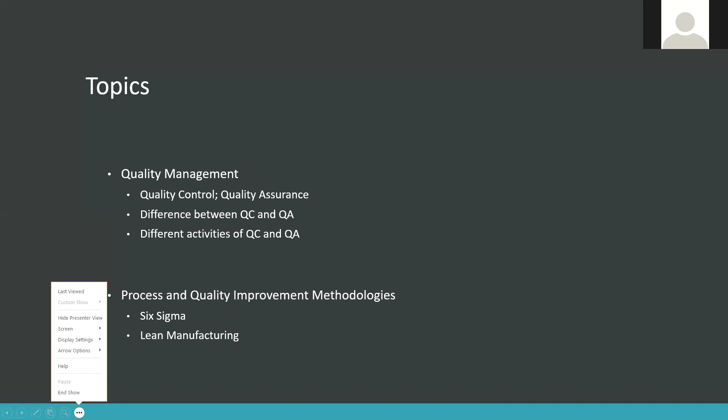So I will share a little bit of what I know, and it might be a little bit different in terms of definitions from your book, but hopefully it will share some of the things that you may encounter when you go into different fields. You may go into engineering or healthcare or business, no matter the industry, you will encounter quality control and quality assurance.

Even though quality control and quality assurance are interrelated, they are actually different by definition and different by function, and we will look into that. Since this is a short presentation, bear with me. I will go only over some of these, just to give you a flavor. But I'm sure Dr. Ray will provide you with the whole gamut from the book. So this is a little bit of my exposure, and I'm just going to share it tonight.

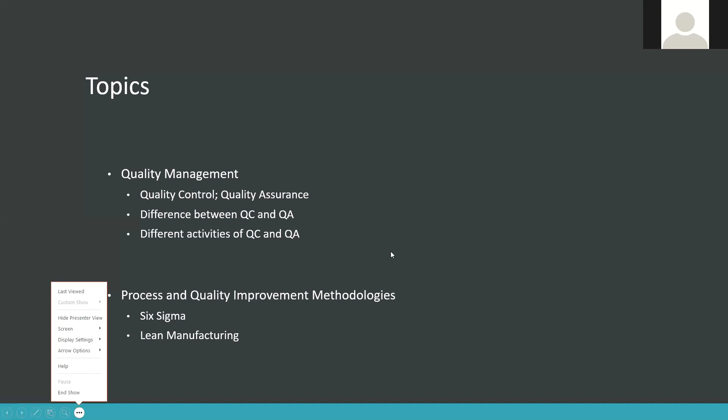First, we need to understand what quality is, and it's quite difficult to nail down, and there are so many different definitions of it. So I offer some of these that I came across. Quality is the degree to which a commodity meets the requirements of customers. Quality refers to how good something is compared to other similar things.

And when used to describe people, we think of it as a distinctive characteristic or attribute. From a customer service point of view, it entails providing efficient, quick, and friendly service. But the most useful definition came from the business side, which is fit for purpose and conformance to requirements. Fit for purpose is the fit, form, and function of the end product.

So you may have a different definition, but I'm sure it's close enough to this. I want to talk about quality control and quality assurance. Like I said, they are interrelated, but they are different by definition. So what is quality control?

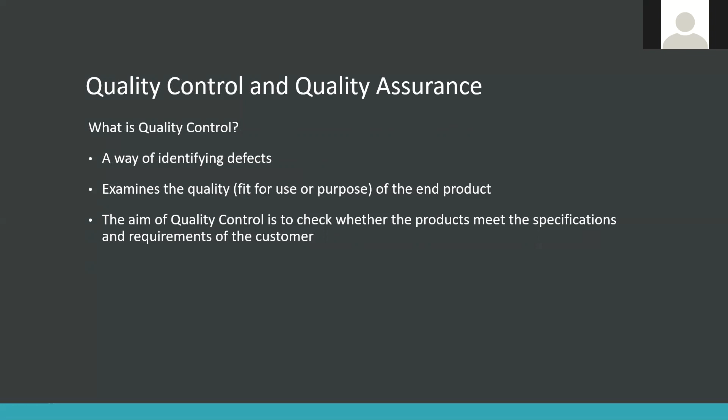So quality assurance is a way of preventing mistakes and defects. It's called defect prevention. So the difference, you can see, is one is defect prevention, and the other one is seeing the defects. So another definition that I know about quality assurance is the way of avoiding problems when delivering products to customers. A declaration. You've probably gone over the ISO certifications. It's a guarantee or confidence that quality requirements will be fulfilled.

In my engineering days, we called this declaration the mil specs. So we work on military specifications. Our components, our processes, our design are based on what is declared in the mil specs. So basically quality assurance is looking at those mil specs, trying to understand them carefully, and designing processes that can be used in the manufacturing or design of the product that will meet the specifications. So it works on both internal and external, guaranteeing or being confident, like I said, that quality will be fulfilled.

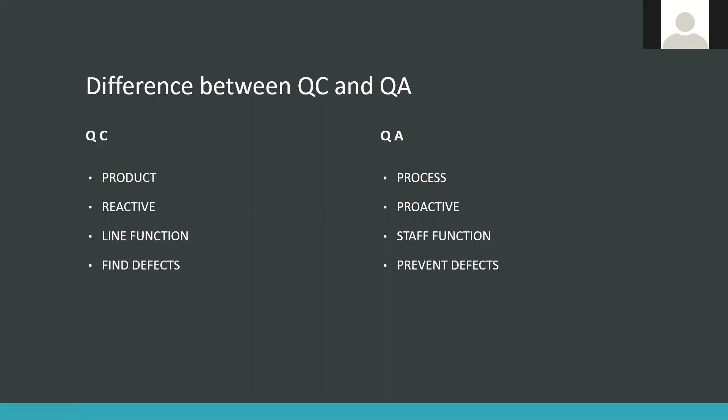The next quality control activity is testing. You may hear in the field of destructive testing, which Consumer Reports actually does a lot. Visual testing is just looking at nonconformities, and maybe electronic or laser-based testing using equipment. Inspection, that's manual or visual inspection, done by quality control inspectors. And also one thing I remember doing is a checkpoint review. This is more like a milestone.

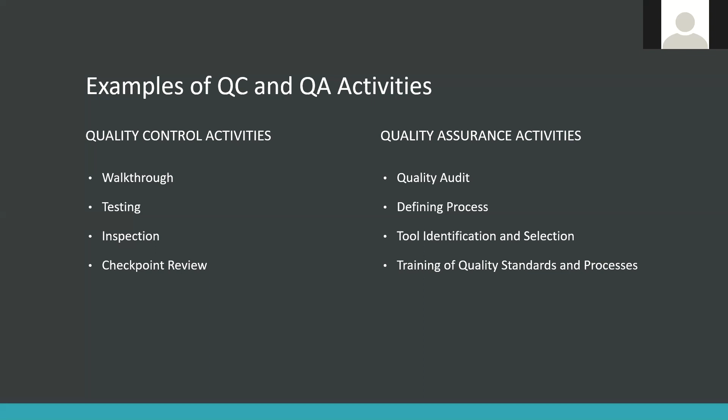So moving on, I'm going to touch on quality assurance and process improvement. Now, in previous slides I mentioned that quality assurance is kind of proactive versus reactive in quality control. But most experts believe that quality assurance cannot be proactive without process improvement. It just can't. So quality assurance and process improvement are really the two key areas in organizational development or performance of an organization. So let's go over some of the definitions.

Now, having said that, this is where the advancement of process improvement comes in. From the time that I started in engineering, there was not a whole lot of involvement by employees. Typically, engineers would tell people how to do their job. And with the advancement of the methodology of quality improvement and process improvement, which I will talk about a little later, employees are more involved. The employee has more say by providing input and assisting staff in the development of processes. Big change.

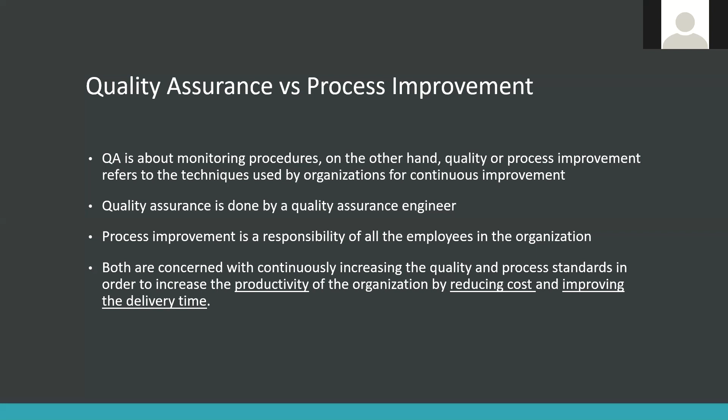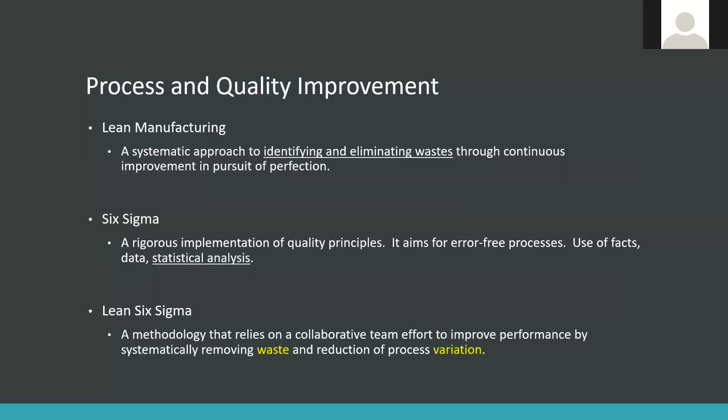So having said that, let's look at process and quality improvement. Well, there are three methodologies that I'm going to share with you, talk about here a little bit. It's called Lean Manufacturing, Six Sigma, and Lean Six Sigma. Let me go to the next slide.

So when we say that quality assurance identifies tools and processes and equipment and so forth, there is a set of techniques and tools for process improvement. And one is the Six Sigma methodology. The Six Sigma methodology is really a heavy use of statistics. It is a rigorous implementation of quality principles. It aims for error-free processes. That means any process should produce nothing but zero defects. We'll talk more about that.

It uses facts and data, statistical analysis, and I'll show you some examples of what those tools are. It was introduced by an American engineer, Bill Smith, while he was working at Motorola in 1986, and I believe it was further developed by a couple of other companies, Honeywell and maybe GE, if I remember right.

So some of the tools in Six Sigma: SPC, you've probably heard about this by now. We use statistical process control to analyze the effect of variations in the process. We use failure mode and effect analysis. It's more for engineering, where we evaluate potential failures in a product. We use the histogram, that's collecting and grouping of data, Pareto analysis, design of experiments, fishbone diagram,

control charts, standard deviation, regression analysis, and of course the most famous is DMAIC, which is define, measure, analyze, improve, and control. Again, I'm showing the tools of Six Sigma, but I believe Ray will cover a lot of these things in your class in more detail, each one of these. I think he might have examples for each one. Maybe you guys are familiar with this.

Yeah, and in fact, Dean, one of the things we did in our last class is we talked about forecasting. And so I gave a little bit of an introduction to some of these statistical processes, like Pareto analysis and doing a regression. We haven't gotten to fishbone analysis, but certainly standard deviation and histograms. So we experimented a little bit with those ideas, and we have some exercises that our class is doing.

Right, and there's a lot more involved in these tools of Six Sigma. For example, there are several control charts that are used to analyze the process or results of the deviations. Okay, so I just want to give you some of those tools.

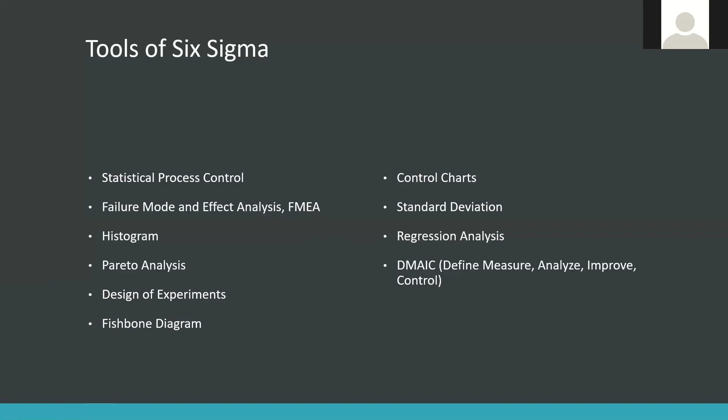Now, another set of techniques and tools that we use for process improvement is called lean manufacturing. It is actually a philosophy. The principles are not just tools. So it's not just an application of tools, but it's actually a philosophy.

If you go and Google lean manufacturing, you're going to find a ton of definitions of lean manufacturing. But this is the definition that I use from my certification from NIST. By the way, I'm certified in lean manufacturing and Six Sigma by the National Institute of Standards and Technology.

So it is a systematic approach to identifying and eliminating waste through continuous improvement in pursuit of perfection. Now I'm adding waste in our presentation here, and I will go over a little bit more about that later on. So lean principles are all about the reduction of waste, or doing more with less,

which is based on the Toyota production system, which, by the way, came from the work of James Womack, who is the author of The Machine That Changed the World. You remember that book? And Lean Thinking. Those are two popular books that he wrote upon observations of the Toyota production system. And lean principles, or lean manufacturing, or lean production came about out of that Toyota production system.

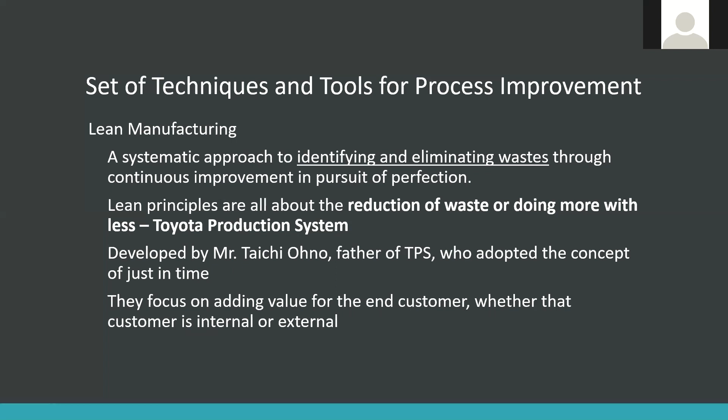So if it's a set of tools and techniques, and we have the definitions, a systematic approach, we have to understand what value is first, and what is non-value. We mentioned that value is a capability. We talk about process improvement and bringing better quality for the customer. Value, we need to understand in a different way, because now we're talking about capability. Value is a capability that you provide the highest quality, at the right time, and at an appropriate price. And it gets a little bit more complicated and difficult to achieve.

Now, value added, on the other hand, are activities that the customer must be willing to pay for. What does that mean? On a day-to-day basis, the customer doesn't want to pay for something that they don't need, or if the production of the product is so wasteful, the customer doesn't want to pay for that, right? If they spend twice to build the product, the customer doesn't want to pay for that either.

Right? So value added are activities only if the activity must change the product. That means, from the perspective of manufacturing or producing a service, the activity that you do must be directly related to or touching the product. Yeah.

And I'm mentioning it because, like I said, lean manufacturing or Lean Six Sigma focuses on elimination of waste. But Toyota has done a very good job at classifying this and making it so simple for us to use. So there are 8 forms of waste. In terms of manufacturing, distribution, or healthcare, they are classified or categorized as defect, overproduction, waiting, not utilizing people's skills, transportation, inventory, motion, and extra processing.

So if we have to identify and measure our performance in manufacturing, the 8 forms of waste go a long way. It's very useful for organizations for making improvements. And quickly, defect is basically producing errors. Overproduction, in terms of lean, is producing more than what is needed by the customer. So when you overproduce, like the picture there, you have a ton of products sitting on and along the desk, waiting for processing, and that is considered a waste.

Waiting predominantly, in any organization, can sometimes be number one. It exists in almost all operations. So waiting for approval, waiting for signatures, waiting for parts, waiting for customers, you name it. Not utilizing people's skills: if we assign people not based on their talents and skills, not utilizing their skills or involving them in process improvement, for example.

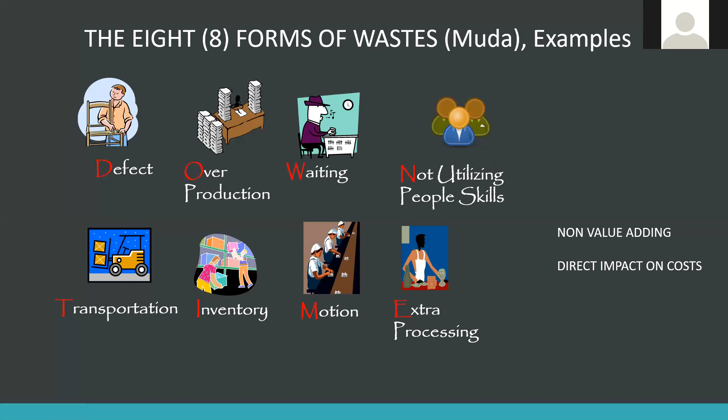Okay. So that's in a nutshell. Okay, and then there's a lot more to talk about this, but just to give you a flavor, there are tools of Lean Six Sigma as well.

Hello? Yeah, we're here. We can hear you. Oh, okay.

Tools of Lean Six Sigma, and now I'm focusing on Lean. And there are so many tools in Lean. Number one, if you heard about it, maybe by now, it's called value stream mapping. It is typically a graphical representation or like taking a bird's eye view of an operation, whereas it studies the

flow of materials from the time they are ordered from the supplier and delivered to your doorstep, the manufacturing floor, processed through in the production system, placed and completed, inspected, goes through the stock room, or directly shipped to the customers.

The difference between a flow charting technique and the value stream is that with the value stream, you are also collecting information. It's actually investigating or evaluating the flow of information. Who's doing and who's telling what in production. Now, sometimes you will find in manufacturing where problems exist. They're telling them so many different ways to do things, and it complicates with one another, and the result is delay.

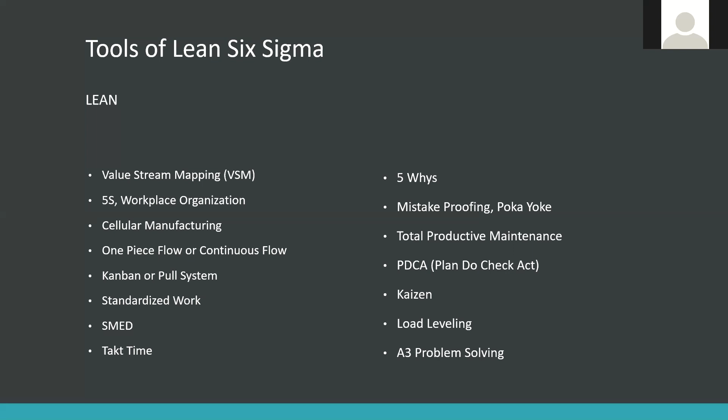Okay, Six Sigma level. Now, if we have the tools, how do we know whether a company that's doing process improvement or quality improvement, spending resources in quality improvement, is performing well or not? This is where in Six Sigma we call it process performance using a Sigma level. Sigma level is, say, 1 to 6. That's why you hear Six Sigma.

Six Sigma is producing a yield of 99.99% efficiency of products. Hardly any defects. It is actually defined as the equivalent of 3.4 defects per million opportunities. That is really, really difficult to achieve. But in any case, a company's performance is measured by a Sigma level of business process. That's in Six Sigma, right?

So if you're Sigma level 1, your yield is 30%. That is not really good, right? So most companies are averaging in the 3 and 4. And now modern companies like Motorola, they're playing around 5 and 6.

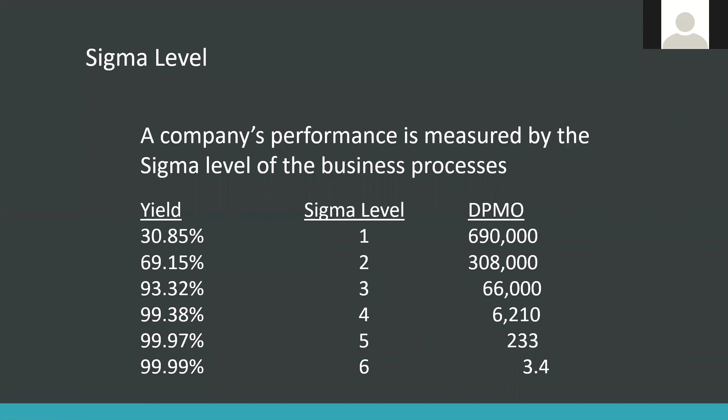Well, and especially when you think about the expense of critical defects. Can you imagine being a phone manufacturer where out of every million phones, you have to do a total replacement of 66,000, and those are $1,000 phones? So the price of not paying attention to quality can be very high. Right. Yep. And that's why we have those quality people there. That's why we were paying them a lot of bucks.

Okay. On the lean side of things, we also measure performance, using what we call lean metrics, and there are a lot of them. On-time delivery is a performance metric. That means delivering on time, as promised. Total cycle time deals with efficiency, producing products as designed in the right amount of time. Yield is the same as in quality. On the quality side, performance is: what is our production yield? How efficient are we in terms of producing good parts?

Customer rejects is a measure of performance. Supplier incoming quality. Throughput is a measure of a group of people producing parts. Capacity utilization, believe it or not, is part of lean metrics: how efficient are you in utilizing the resources available? This is a conflict with the accounting department. At that time, accounting would want production to show that the equipment runs 8 hours or 16 hours a day. That's their measure, because they want to see that measure, right?

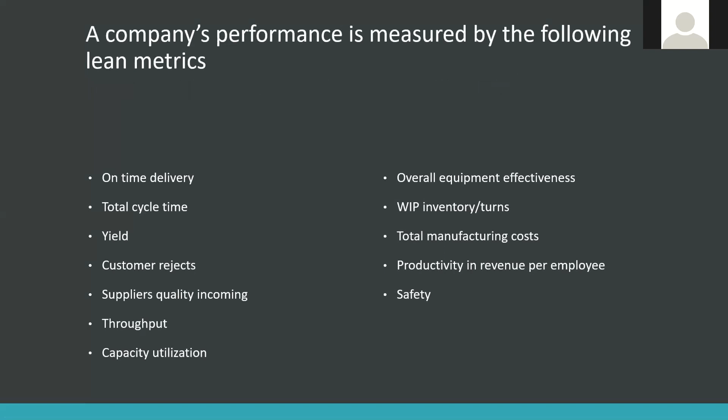Okay. So having said all of this, you have a good background now, and a little bit more on the application side of it. If you don't have any questions, I have a question. If you go back and think about waste and creating value, elimination of waste and elimination or reduction of variation, the question is: how can companies create value and profits? Anyone want to take a crack at this?